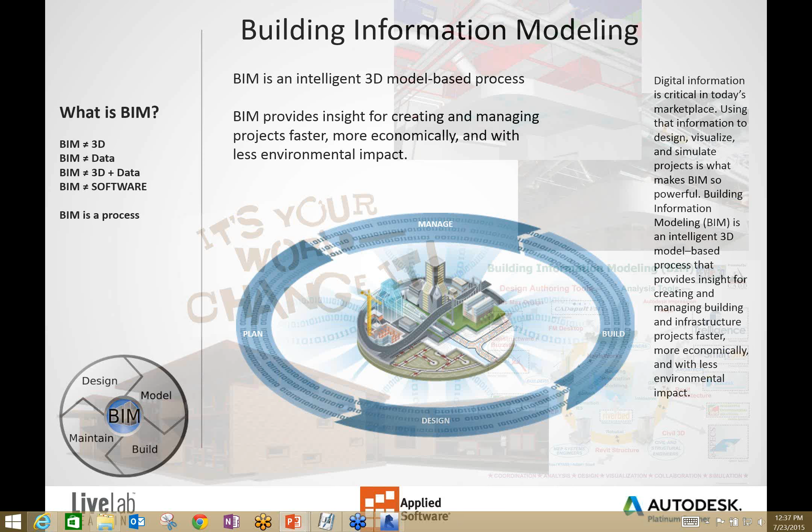So most of you, hopefully, are already involved in implementing BIM, and if not, then hopefully this will be some good foreknowledge or a good stepping stone into the conversation about BIM for multifamily projects.

Some of the basic advantages for multifamily or any project using BIM include being able to contain your project and all the information about it in a smaller data set that is predominantly 3D geometry, but also has relationships and information you can leverage for analysis, cost estimating, lighting analysis, visualizations, and so on. So much capability, and I think people using Revit for multifamily design are already seeing the benefits of that. Hopefully I can clear up some misconceptions about how to use Revit for multifamily design, but also maybe teach you something if you're already using Revit for multifamily design.

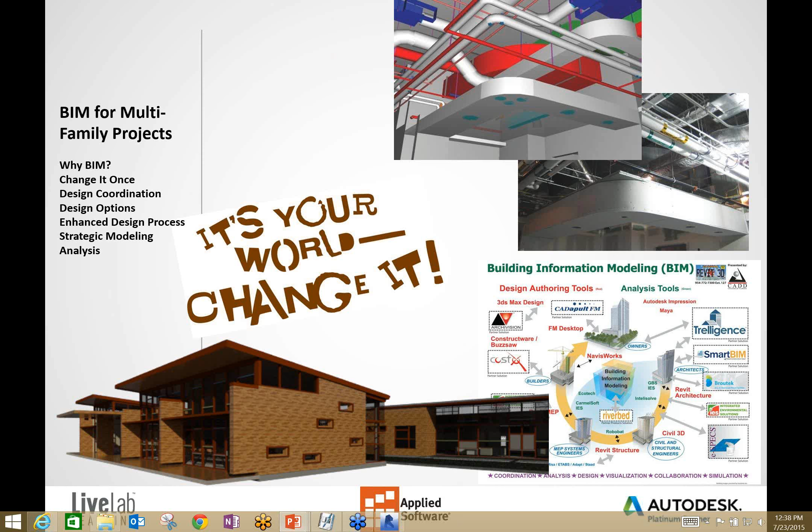So some of the learning objectives for today are just understanding what the current trends are in setting up multifamily projects using Revit, the different advantages of groups versus links. They both have advantages, and we'll talk about how you could even choose to potentially use both in your project.

Can nested families define units? We'll talk a little bit about that and what you can and cannot do with a family, and some of the things you might want to consider in using families for a particular part of your project.

But also clear up any mysteries about whether you can use it for actually the whole unit design. And then kind of sum up about what considerations or things you might want to think of when you do your next multifamily project, and talk a little bit about MEP design for multifamily also. The techniques that we're going to talk about do extend into other disciplines, structure, mechanical, electrical, and plumbing, and definitely want to hit some of the points regarding those.

I don't have a lot of graphics. I intended to open up Revit, look under the hood at some of the basic functionality just so that you can see some of the things that I'm describing, and hopefully generate some questions that we'll leave some time at the end of the webinar for us to answer.

So multifamily, this is just an example, a project that I started with a company, going on 8 years ago, maybe even longer. It was a company that did a lot of multifamily design, and this was one of their first projects.

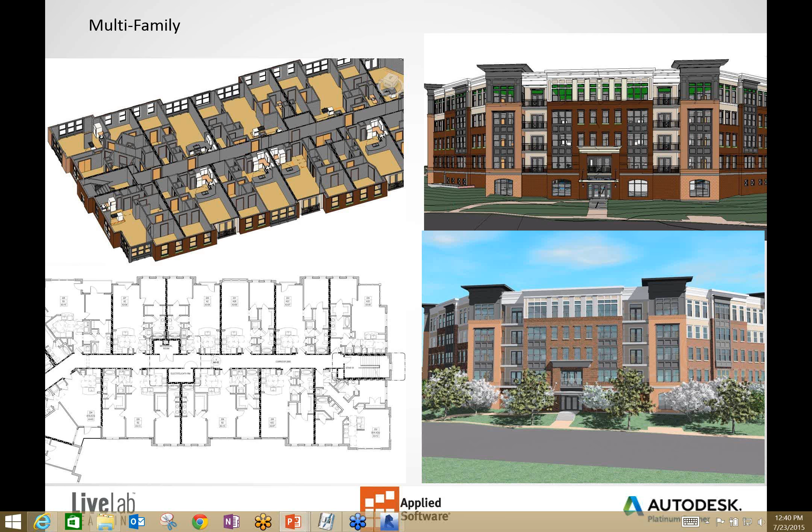So although this presentation is focused on multifamily, it's really about multi-unit design. And multi-unit design includes more than just residential.

Certainly it means garden-style apartment homes, high-rise apartment and condominiums, but it also means hospitality for hotels and resorts where they have units that are repeated multiple times, the same unit multiple times throughout the design. Dormitories, another form of housing, somewhere in between apartments and hospitality, but effectively a similar residential type of use.

Healthcare. So in healthcare, there's also an opportunity to leverage some of these techniques for patient rooms. Sometimes surgical units are defined in a very specific way that they have a repeatable plan, and so that can be considered a unit. In education, you have classrooms often that are used maybe in primary and secondary education, and even post-secondary.

When you get into college and technical school level, you have classrooms and sometimes labs that have a very finite design that end up being repeated multiple times. So just want to make sure that people understand that although this is called multifamily, I almost wish we had called it multi-unit design for BIM and Revit, just because it really can reach into other types of design projects.

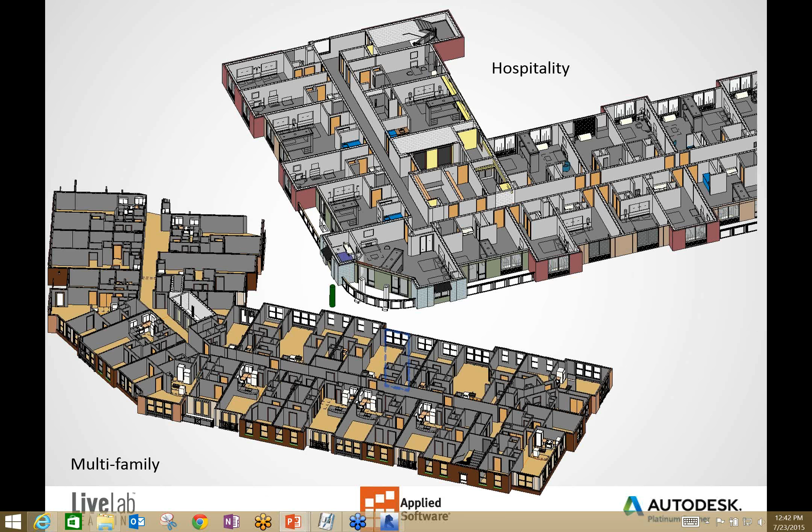Again, just a couple of cutaway views of a couple of different plans, one being hospitality, one being multifamily, and we'll take a little bit closer look at a couple of these plans, use them as examples for some of the things that I was going to talk about during the presentation.

A big consideration in making choices about how you use Revit for multifamily or multi-unit design is going to be the project size. So you may make different choices depending on how large the project is. Many people who are still getting into BIM and may not already have a lot of experience with it or Revit

may not understand that BIM does not mean everything is in one model. Now, as much as possible, we like to put as much of the project in a single model, but when it becomes a large, meandering, say, garden-style apartment project, it tends to be unfeasible to contain that in one model. Or if it is, it does require a lot of view work to break it up.

So you may have a master file, I didn't diagram this, where you link all your buildings into it if you're trying to do a single set of documents, and a lot of people are starting to do that. Again, it's kind of getting back to a little bit of a CAD type of workflow in some respects, but what we're doing is linking all the different parts and pieces of the project into one file that's used for documentation and let the other models end up just being the design.

So I don't want to talk too much about that, but certainly when you get into large campus style projects or large buildings that really need to be divided up, you need to think about that ahead of time.

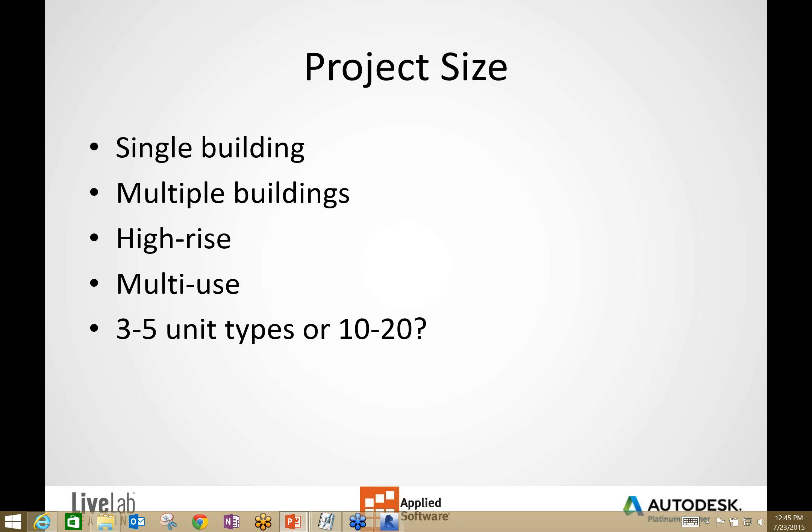So all these are things to talk about. How did we do it in the past, or how are some of you still doing it? I'd guess that a lot of you, if not already using Revit for multifamily or multi-unit design, are using AutoCAD or MicroStation and doing a lot of referencing or XREFerencing depending on the product. You'll have your units as a file unto itself, referenced into a level plan, which makes your composite plan, but you might have base building envelope information from another XREFerence. So you might have this XREFerence scheme in your organization.

The benefit of Revit is to eliminate some of that need, or at least reduce the amount of files. With unit design, you still have the units, and that's a big part of the conversation today.

Lines in lieu of walls. What I mean is, unless you're using a more intelligent CAD package, you're probably just using line work to represent walls, doors, windows, furniture, plumbing fixtures, and so on. Those using Bentley architecture or AutoCAD architecture are using BIM-style tools that allow a bit more intelligence in what you're designing, but you're still working in a CAD environment.

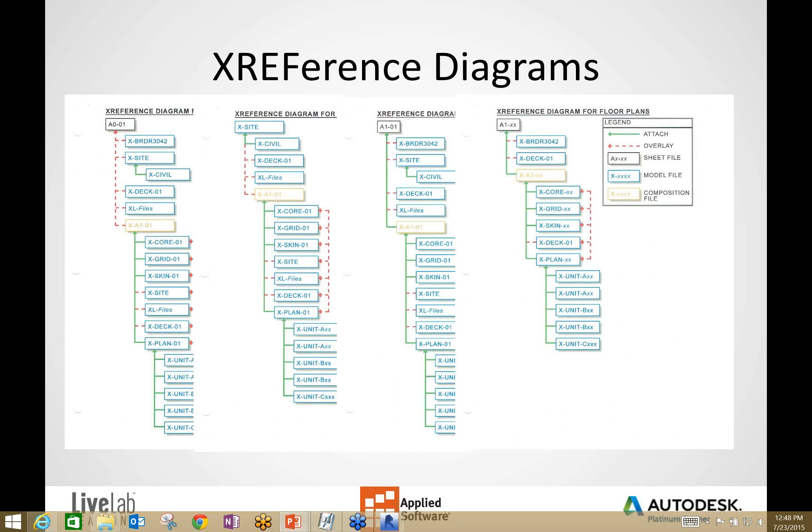So I see a great opportunity here. This is usually a smaller group, often one or two people in a small to medium-sized firm, but they're the ones doing the feasibility studies, getting a site plan and trying to determine how much building, how many units they can put on a project.

They can actually mass the units, group those together, and make a building full of units. You can add levels and intersect the masses and get some quick area analysis and determine what is possible on the site, and even use design options to come up with different iterations or scenarios for different parts of the site. So I may try to do a massing webinar in the future where I expand on this further, and I do have the file that I can pull up if anybody has questions later. But I do think massing has an opportunity in early multi-unit design.

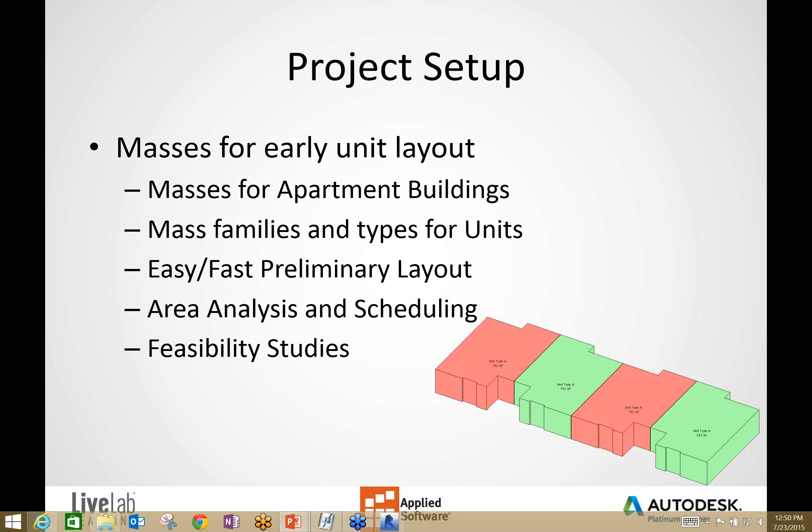So the big question is, how do you set up your project? How do you use this very powerful tool, this very powerful process, and leverage it in such a way that it's going to make your work easier, make it more accurate and less frustrating, and in the end, we want to make more money. We want to do great design, but we don't want to have to spend all our fee just figuring out how to document our designs and get them out the door.

But more and more people are working with larger and larger projects, and there's a lot more coming down the pike. So they've come up with, if you will, more CAD-like ways of breaking up the project where units are separate files and they're being linked in. What that does is give you an opportunity to make the envelope of the building a separate file, and then all the unit interior portions can be designed externally and then dropped into those unit shells, if you will. I've looked at it multiple ways, I've looked at a lot of blogs online, and the trend is going more towards links. But I think groups, either combined with links for different parts of the design, or groups in lieu of links when it's a smaller project, is still a viable way of doing units.

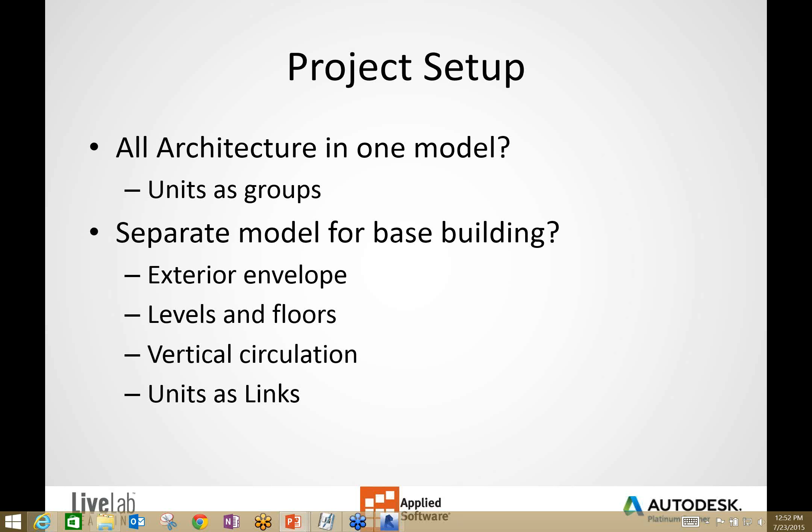So what do you include in a unit? If we're talking about it as a group, does it have all exterior walls in it? Does it have all your doors and windows? Demising or common walls between units, interior walls and doors, casework, countertops, plumbing fixtures, you name it. Furniture - sometimes I've seen furniture in units. Certainly in hospitality you might represent furniture, how things are going to get laid out. Electrical fixtures and HVAC. So again, starting to think about the mechanical engineer and him starting to lay out his designs for the units, and if they're consistent, then he can group his information also to make it more efficient for his work.

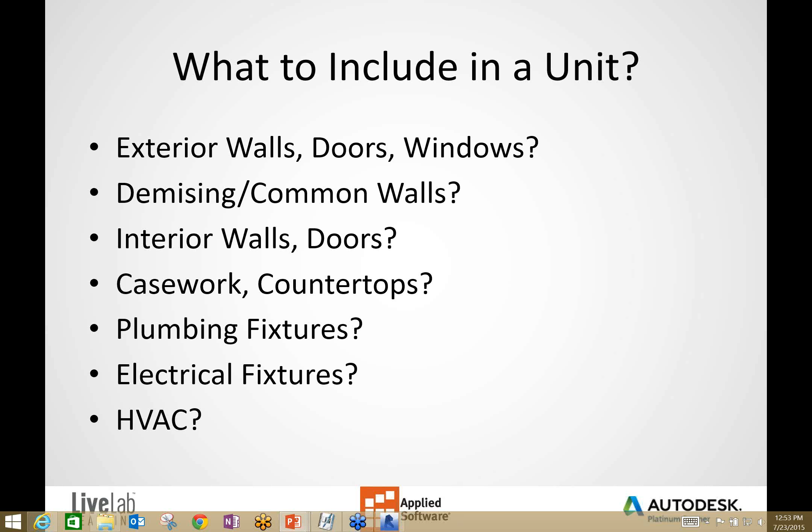So at some point I'll actually get into Revit and just show you some of how this breaks down and what it looks like. Not really big models, but enough that you can get the idea.

So groups, again, as I said earlier, work well in smaller to medium-sized projects. I have an example that I've used for some of these slides - I forget how many units, I think it was about 120 units overall, a 4-story project on top of parking. It was manageable with groups and it worked pretty well, and it was a first project for a team, and they were successful in using it and completing it that way.

So groups are really easy to create, they're very easy to modify, and they have some characteristics that make them very appealing. However, groups sometimes - and I didn't put this as a bullet - do have, for lack of a technical term, some flakiness at times, depending on what you're doing with them in Revit. If you keep it simple and you try not to do too much with groups, and you're very judicious about using the exclude command, groups can serve you very well.

The nice thing about groups is you can start out with them and then you can easily convert them to links, and we'll take a look at that.

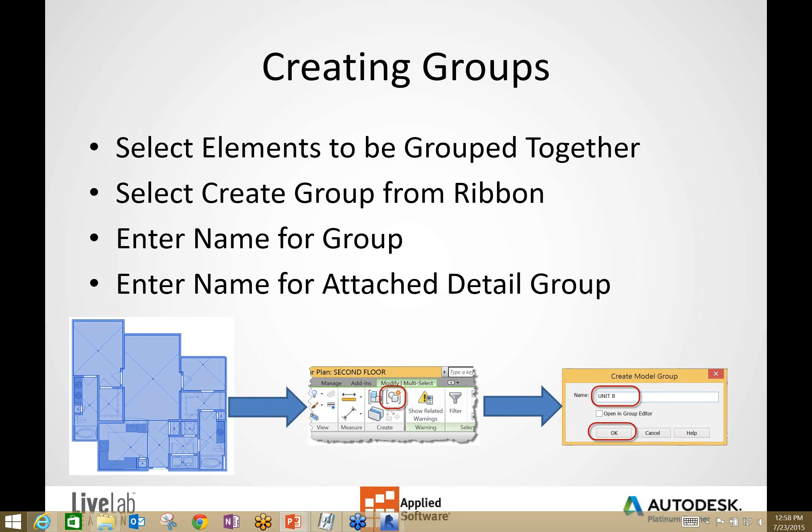A couple of examples of different thought processes on what you would group together. In this particular example, the unit and half the demising wall - since it was a dual stud or dual track demising wall, one side of the demising wall - and the common corridor wall, and all the interior partitions and elements were included in the group, and that included the room objects.

I have tried many times working with clients to include the exterior skin, especially if it's not a heavily articulated skin, and it's just problematic. It would have to be a very regimented, very predictable, and very simple skin, in my opinion, for you to even consider including that as part of your unit groups. The skin generally may have elements that pass from one level to the next, so trying to include just those parts into a group can get very messy and complicated. I don't have any example where I've included the exterior skin as part of a group - it's either its own file as part of a base file, or it's going to be ungrouped, just the exterior skin of the building.

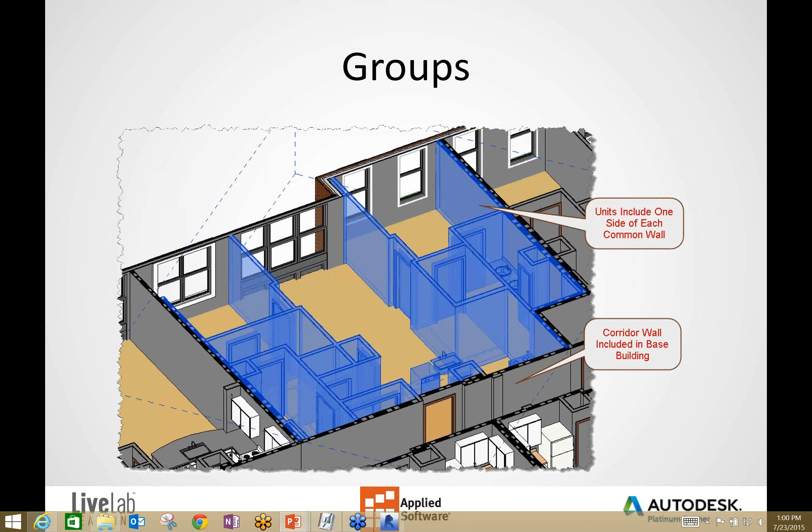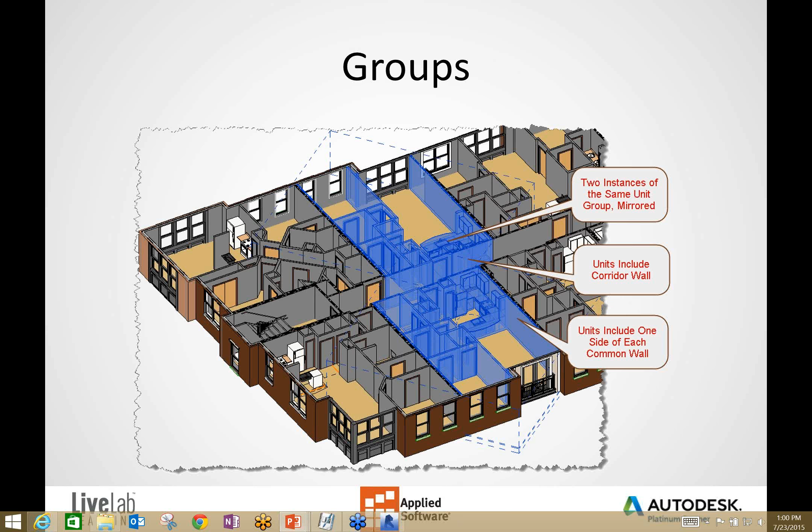So basically that was just a progression of where we did it with this one project, where it was half the demising wall, which can get a little sticky, the corridor wall, and all the interior elements, but no exterior wall elements. Then just dropping off the corridor wall, and then dropping off one half of the demising walls.

That can get challenging with elements that are wall hosted. So you may need elements that are a combination, wall hosted where they're being hosted by a wall that's part of the group, and duplicate versions of those where they're not wall hosted and not dependent on a wall for hosting them. That way they won't accidentally disappear if the wall that they need is gone.

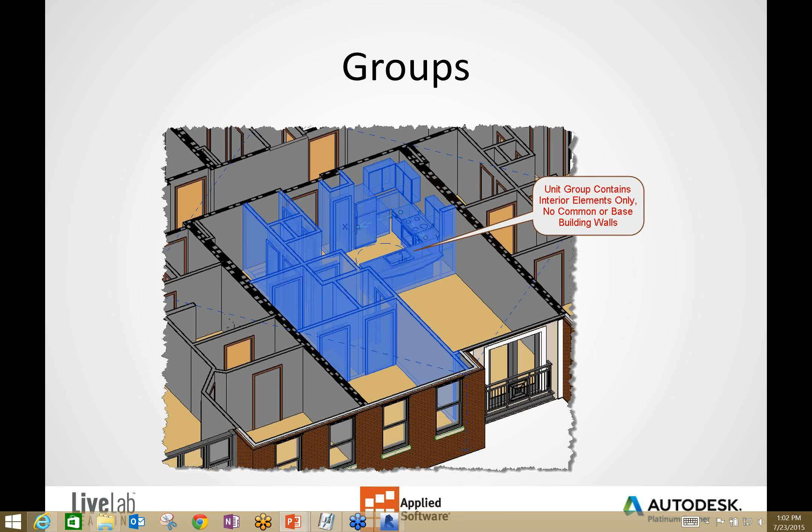Another reason why you typically leave things like doors and windows as part of the exterior skin, as part of the skin file: if you put those into the group, they will always need a host. The nice thing about groups is even without a host, the definition of those elements will still remain in the group, so that if you reintroduced a host element for them, you can re-include them into the group, and then they'll find the host if it's in the right place.

Not ideal, so I tend to advise people away from that, and it's also something you'll see in a lot of the blogs and postings - be very wary of wall hosted elements, or hosted elements that are hosted to elements that are not in your group.

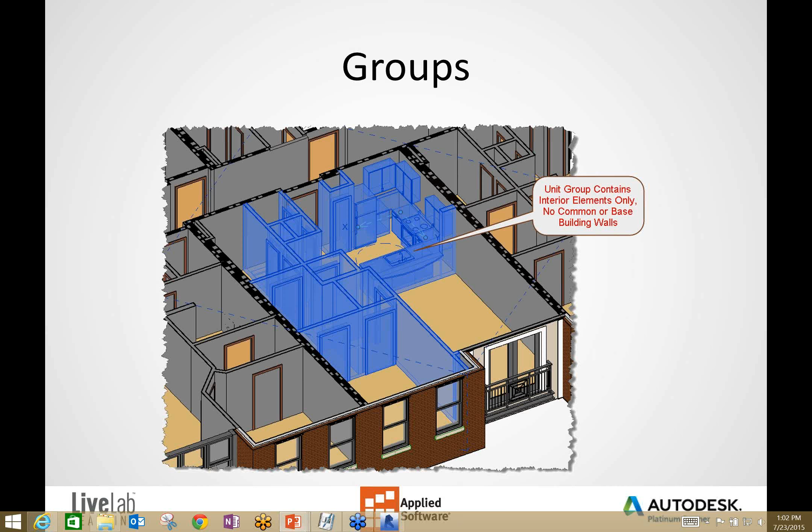And then there's the ability to replace groups with a link. You can do that dynamically by just converting a group to a link, but you can also send a group that's defined in your project out to a file, and then at a later date replace it using that same tool, but now using a file that's already out there that was generated from the group definition that maybe somebody else worked on. So I didn't clearly state that in this slide, but you do have a couple of ways or workflows for doing that.

Again, best not to group hosted elements without the host. Floor-to-floor changes can be challenging. I've had some friends and clients who have created unique workflows for making the walls extend to underside of slab at one level and then vary it at another level just by ungrouping at that level, extending walls, say, to underside of the floor above, and then placing multiples of that, and it seems to work for them. But again, it can be challenging, and there can be hiccups along the way, and you may have to verify wall heights at some point to make sure they're not too high or too low from one level to another where there's a different floor-to-floor height.

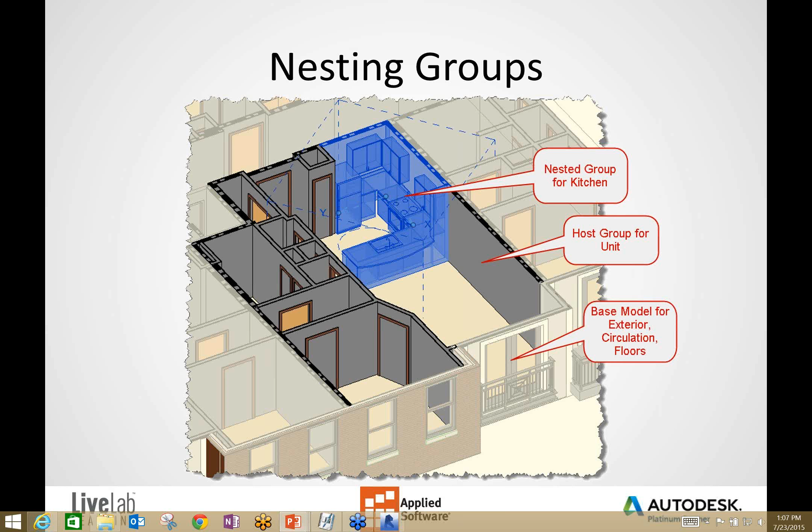So some of the pros and cons for groups. I would say the pro, the workflow, it's very easy. In-place editing is awesome. The walls are easier to make cleanup with the demising and the exterior skin walls as long as they're all in the same project. You're just making your views right there. You don't have to maybe make them for the unit plan elsewhere.

Scheduling is really good except for the units themselves. So you do need something else to schedule the units, and that gets to the family. Maybe I shouldn't have put that bullet in the way I did. Less management? No, I'd say it's different management.

Override, so the whole being able to exclude elements. Performance? That's going to depend on a lot of factors, like I said before. Number of units, variations of units, nested units, size of the project, so the overall number of instances of the group.

As the numbers go up, that's when groups are going to start to look less and less attractive. Cons, again, performance gets worse as it gets larger, but that's pretty much typical of the nature of the beast. The more complicated, the more stuff, the larger the model, your performance may take a hit.

There are some known issues with groups. Some people have inconsistent results mirroring groups. I guess I've been pretty lucky, but I'm not doing a lot of production work these days.

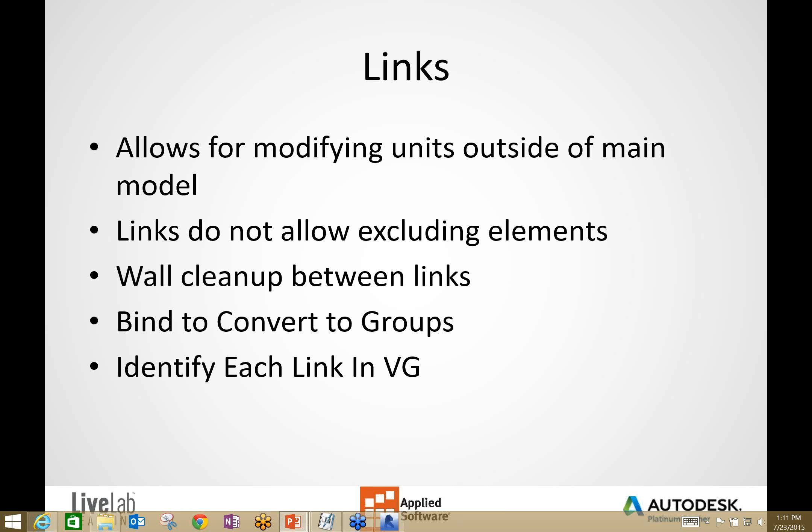Links are easy to identify by giving them a unique name, which can be the unit number, the unit type, or a combination of both in visibility graphics.

It does tend to keep individual files smaller because now you're linking stuff, and you can unlink when you don't need a particular unit or units, and just work on, say, the exterior skin of the building. Certainly if it's a workshared project, that comes into play too, allowing you to put your linked units into separate worksets.

It does help control the consistency of the unit layouts a little bit better, because you don't have an easy way to exclude elements. They're pretty flexible and similar to a CAD workflow. That's not a bad thing.

I'm just trying to make an alignment there, and a lot of people have been saying that, but in the back of my mind, you're still using Revit for your units. You're linking them, which means you're combining them together into a composite model. That's still good. You're getting the benefits of Revit for all the work. You can still schedule it. You still get the immediate update. So even though it's more of a CAD workflow, it's still BIM. Don't let anybody tell you otherwise.

And again, I put the question mark after this. Some of these actually came from comments people put on the web, so they're not all mine, but I wanted to be a little bit transparent with you all.

Let's see, management issues: system names, avoiding duplicates, dealing with documentation issues. The only issue there is the same anywhere as if it's a big project with multiple files - you've got to bring them together, ideally if you're doing one set of issue documents.

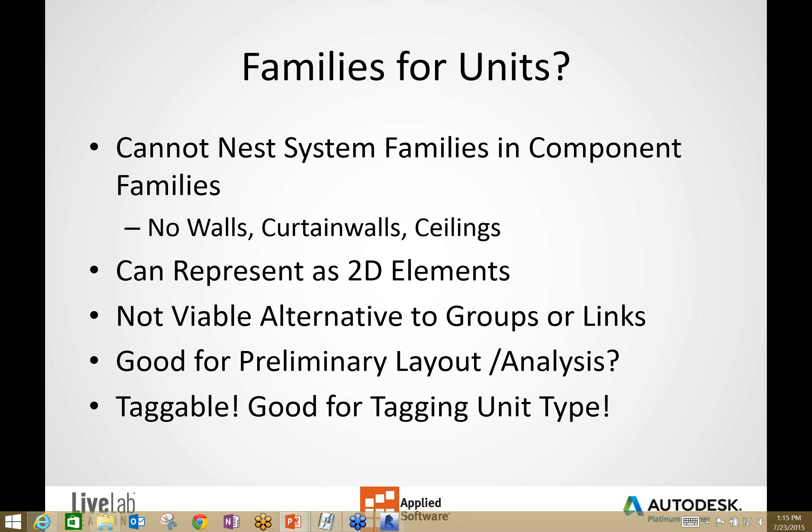I like area plans also as a way of showing just the unit layout and also doing color fill plans with it. So I'll just jump to it, and basically area plans are already in Revit. You can use the area separation to define what the limits of a unit are, and then you can give these things a number. You can give it a name that represents the type, and it will also calculate the area for the unit, so you can very quickly get a nice way of presenting that stuff, but also labeling it.

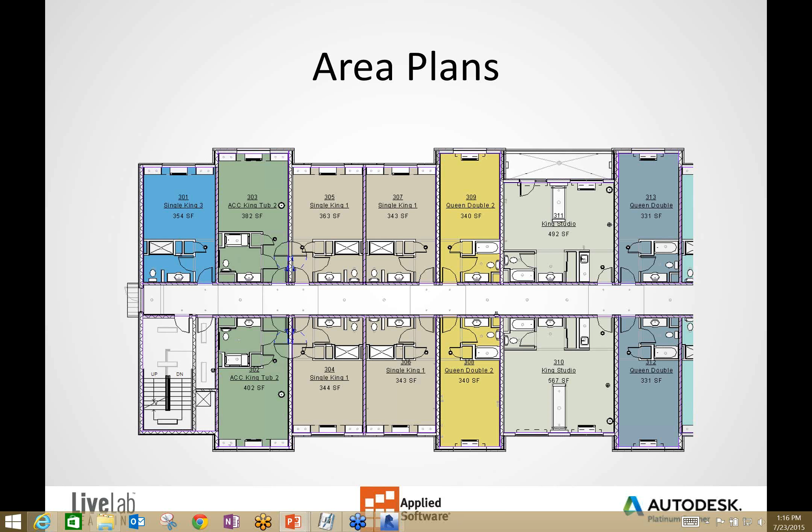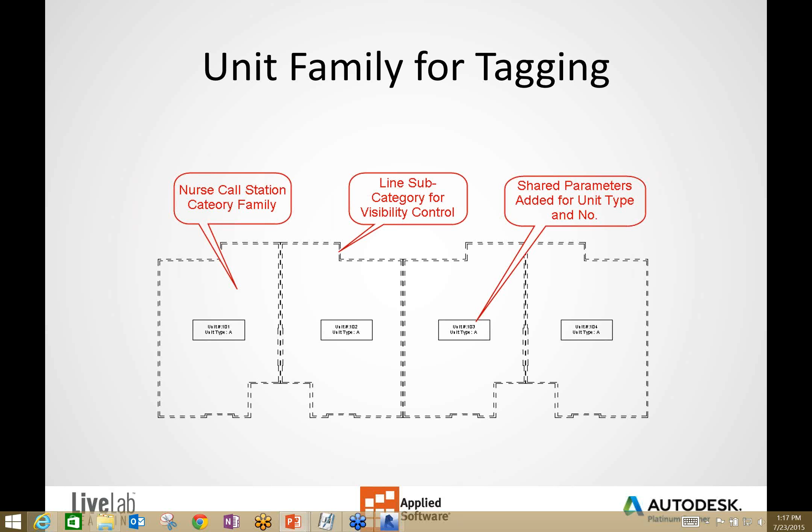We still need a way to label the units, and most people I've seen are just using a generic tag. Going back here, what I did was set the family category to something unused, like a nurse call station, which I'm not using in my multifamily residential design. If it was assisted living, you might actually use that. So you just pick some less-used category for the family so you can isolate or filter it out.

All right, we're getting close to the end of the slides, and I should hopefully have a few minutes to open up Revit and show you a couple things.

Groups are still a benefit for MEP design, provided the layouts are the same. If you have a unit A and then A1, 2, 3, 4, 5 with only minor variations, but the HVAC is identical in all of them, why not group it? You can. Most multifamily design has HVAC as an isolated system for that unit anyway, which makes it good for grouping. When you get into classrooms, education, or healthcare, it may not work out as well, and you may not be able to leverage the benefits of groups or links. But certainly for multifamily, it's there.

Electrical, not so much. You can group the fixtures and equipment, but the panels and circuiting should not be grouped. At least that's the wisdom I was given by my MEP expert on staff, who actually co-authored a book on Revit for MEP, so he's quite knowledgeable. He's an architect first, but he's put a lot of time and effort into working with engineers on that book.

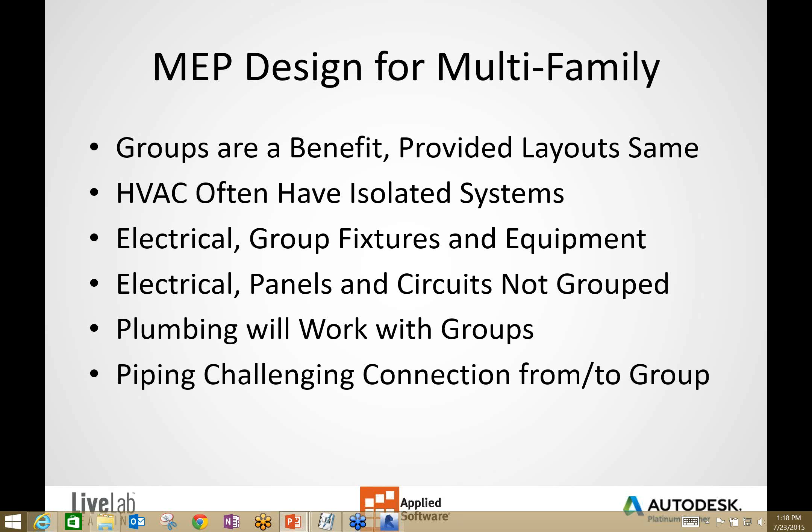Plumbing will work too. The biggest challenge with plumbing is where you have a supply line coming in, or maybe a waste line coming out to a central line. Where they connect, it will want to put in some sort of connector. I meant to put some more detail in this slide, and I think I forgot.

Obviously, common areas, public space, and amenities won't be grouped—they're just part of the overall design.

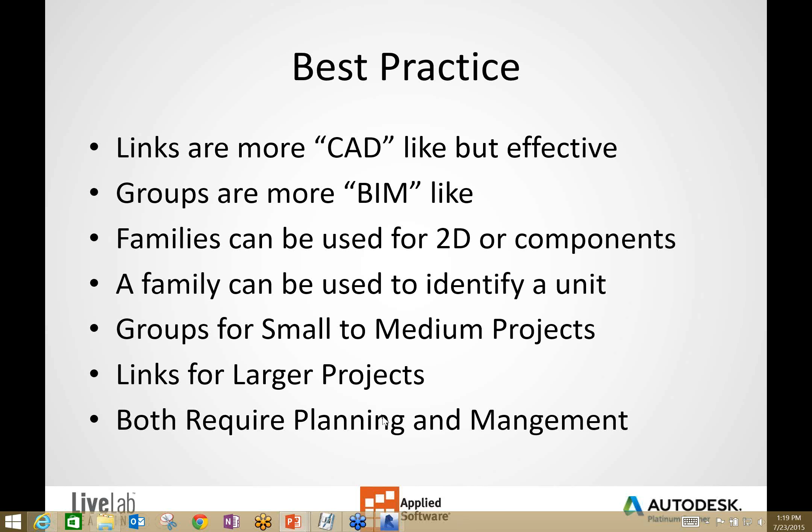Let's see, I've kind of gone over all this. Links are more CAD-like, but effective—and don't take CAD as bad, it's just a more CAD-like workflow, let's put it that way. It's still BIM. Groups are more BIM-like because everything's in the one model. That can be a good thing, but as the project gets bigger, maybe not so much. Families can be used for 2D or components, but not for wall geometry or system families. A family can be used to identify a unit, as I showed you. Groups are probably best for small to medium projects. Links are probably going to be better for larger, more complex projects. Either one is going to require some careful planning and management.

Some more best practices: work sets. Obviously, if it's a work-shared environment, work sets can be a good way to isolate some of the geometry, whether it's some or all of the units from the main building, the amenities, or even different levels.

Phasing can be helpful too. I've seen phasing used—I don't want to give away anybody's secret sauce, but I'll throw it out there so maybe you can explore it on your own. Phasing can be an interesting way of setting up units as a whole unit, and it can be used to control when and where, say, common walls show up in a linked model, and where they're going to be linked.

Again, families can help with tagging, and groups and links can be used together. You may link the main geometry for your unit in, then copy it around, mirror it, whatever—mirroring links works wonderfully. Then use groups to populate some of the detail information that may vary from one unit to the next, like furniture or maybe even a kitchen.

I probably should see if there's any questions. I may switch to Revit while Casey's maybe sending me a question or two, but I'm going to go ahead and at least open up Revit here.

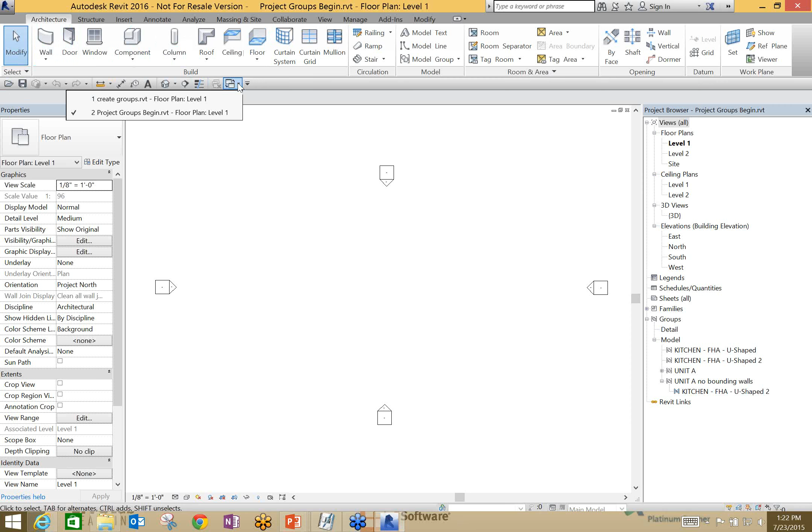The first question is, can you go over your reason for switching a group to a link? This might be a good segue - you may have some units you've developed in the past on a project. You could export them or save them out as their own files, and then when starting a new project, quickly bring them in as groups to start your tentative design. Let's see, I have another model here, and once the group layout has settled down a little bit...

...then you could actually export them back out as links. And when you export something out as a link - let's see if I got the right one here. This is all for creating a group, but these are all the same one. If I created this as a group and it's all the same unit, say there were 10 of them on the floor, I could pick each one of those groups and send them all out to be a link, or have a file that already exists replace them as a link.

So early in design, groups may serve you better by not having to coordinate links and where demising walls are, everything. You do some of that with the group in the design, and then once it gets further along, maybe into DD, you convert them over to links. So I see groups as a way of starting a project and then converting them over to links. I hope that answers the question.

And then someone added to that - when creating a link, is a common reference point needed? No.

I'm kind of laughing because I was working with a couple of files earlier and I didn't realize the unit was at some elevation way up above the basic template I was starting with, and it wasn't showing when I linked it in because it brings it in at that elevation. So elevation is probably the biggest thing to watch for with a link. As much as possible, start with a common base project elevation of say 0 feet 0 inches, instead of having your project at 0 and your unit from some other project at some other elevation. But other than that, no, because you're going to be moving, copying, mirroring, and potentially rotating them anyway. But the level thing can take you by surprise, like it did me.

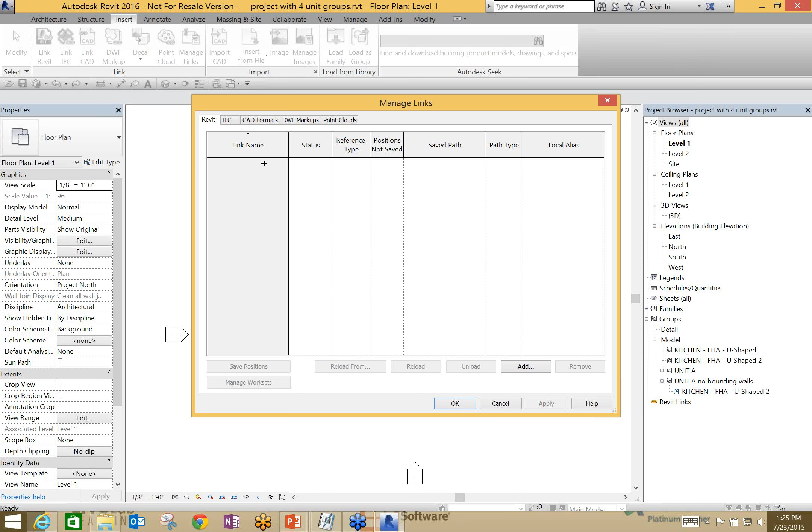Can't remember if this one's... oh, these are all groups. Sorry, this isn't all links, that's not going to help you. Yeah, these are all groups. But effectively, if this unit was linked in and I go to open up that unit file that's linked in, it will unload it from this file. Then when I close out of the unit file, I'd have to reload it. You do that through the Insert > Manage Links dialog, so you'd have an entry for every unit that was loaded in. The one you opened up would become unloaded and you'd just have to reload it.

What was your reason for not including windows in groups and keeping them live in the model? Is this to reduce live wall hosting problems with the windows?

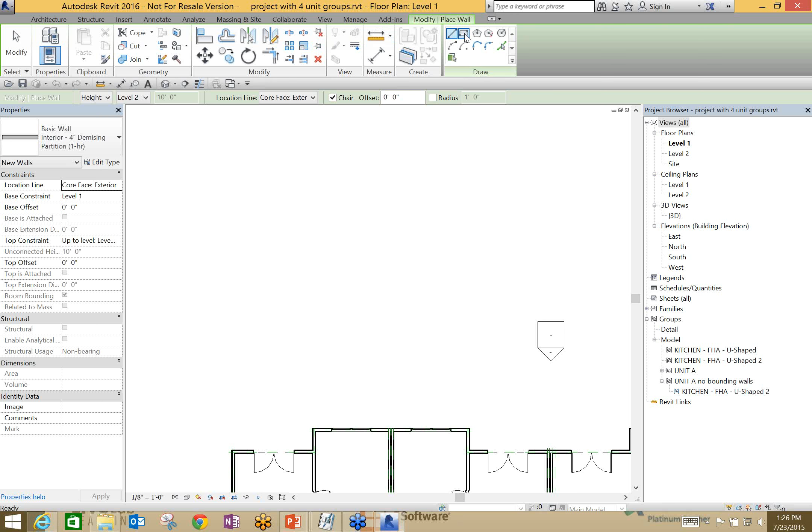Yeah, I'm going to do it with something a little simpler because it'll be easier to show, instead of working with one of these bigger layouts. So let's just assume that's my unit plan. I'm going to keep it really simple... wall. Okay, and just to keep it simple, I'm just going to put a window here, okay?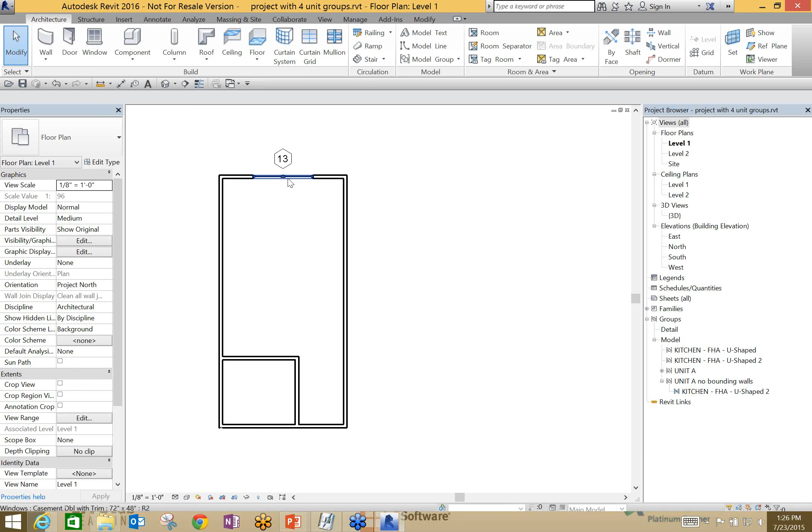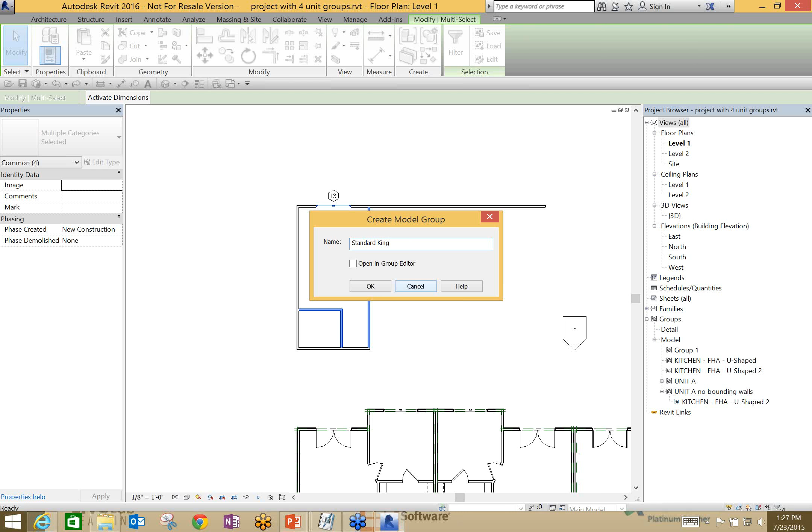Now, if my unit is just going to be the interior elements, whatever they may be, imagine this wall keeps extending out here, and maybe I decide to take this as well, and I go ahead and make a group of it. So you select your elements, use the Create Group tool, and I'll just call it standard king or something like that - using hospitality as an example. So there's my group, and I can even move the insertion point, maybe make it the inside corner of that room.

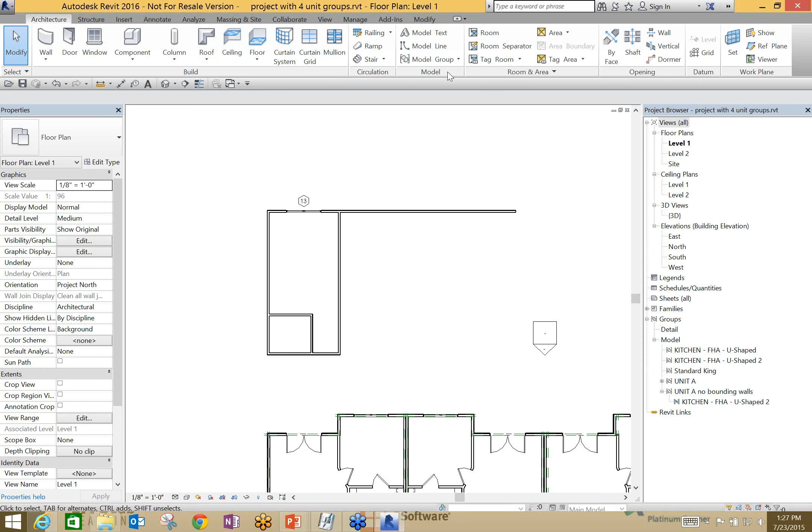So if I want to place this now, that window is part of my group definition. And that's one thing that's pretty clever that Revit does: if I come over here, I've got two ways of placing a group. I can go to the Model tab, Model panel, and go to Model Group, Place Model Group, and then any model groups will be listed in your type selector. I want to do the one I just created, which was Standard King.

Now, as long as I place this with that same insertion point where that window will intersect that host wall, I've got no problem. You notice that this group placed and that window placed.

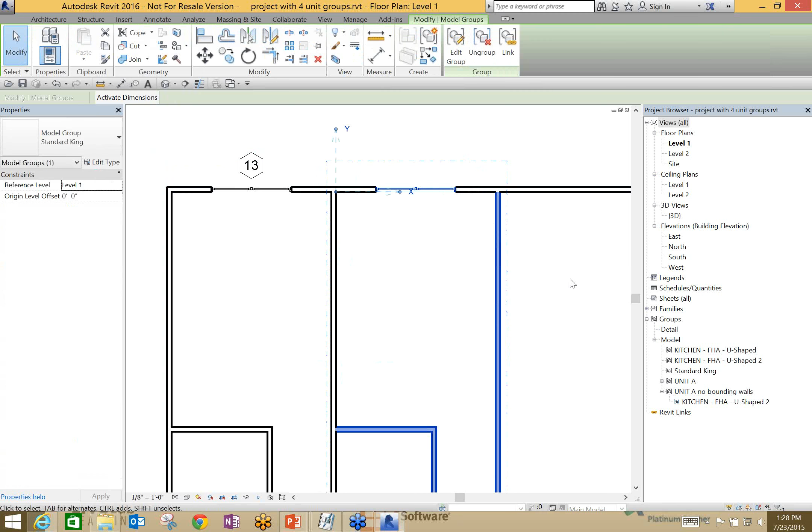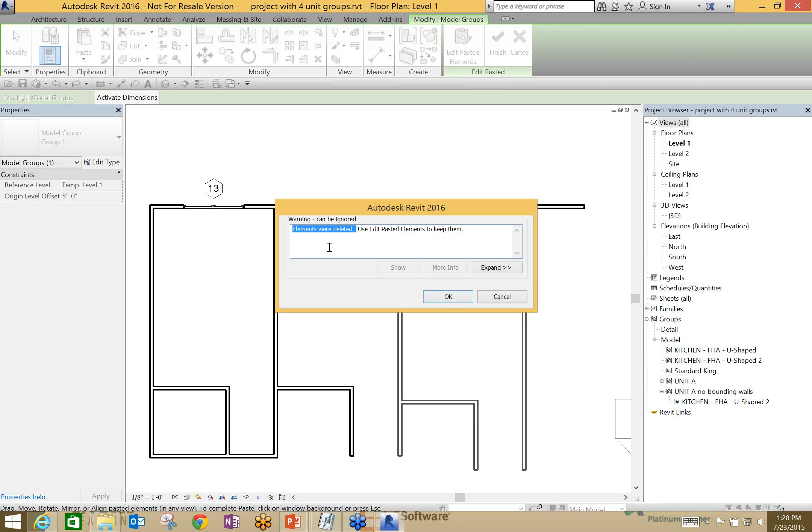The biggest problem, and this is correctable by the way, is if I place this group again and say I either get a little twitchy or I just snap to the wrong thing, when I let go of that group it's going to tell me elements were deleted. That language is typical Autodesk Revit scare-you language, but it's not absolutely true. So if I hit OK, well, great—first of all it's in the wrong position, but notice what happens when I hover over on top of that group and select it: that window is still there.

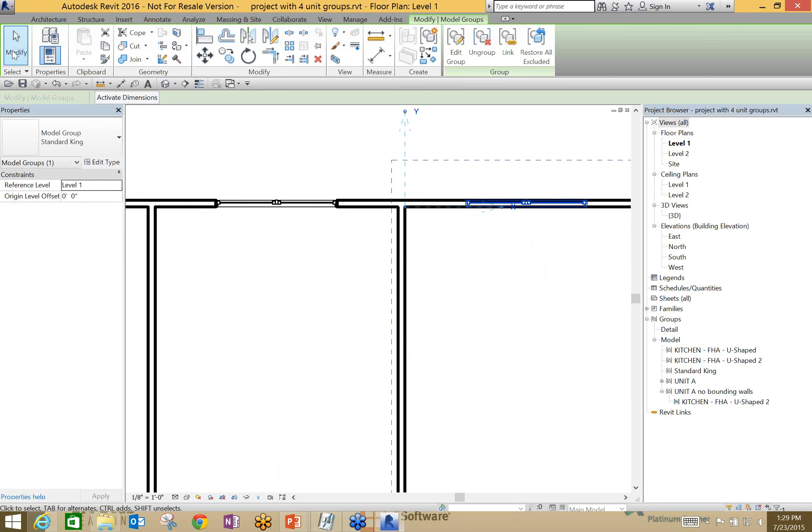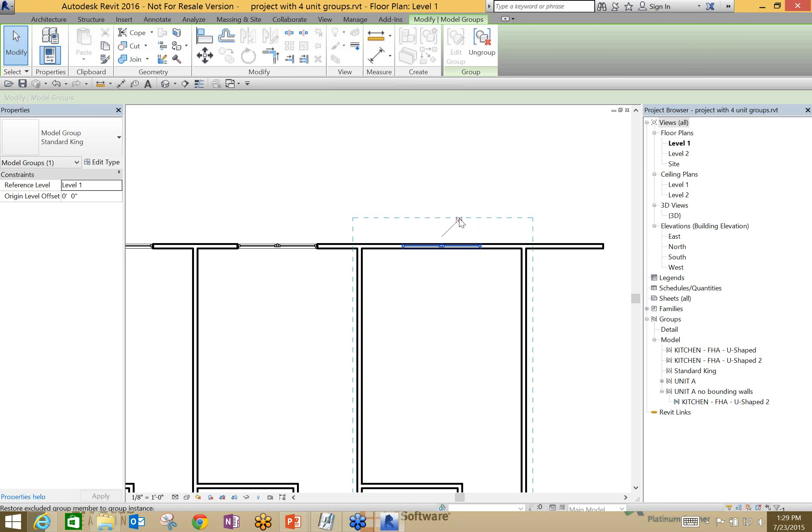So if I now move this group into the correct position, let's see if I can find its insertion point and bring it up there. It will not automatically be re-included in the group. I would have to select the group, hover over it until I see that element reappear, tab over it until I can select it, and you'll get an icon that allows you to restore it or re-include it back into the group. When you do that, it will find the host and you'll be okay. So it's not that you can't—you'll just run into situations where elements won't appear if they don't have the host. But if you reintroduce the host, you can make them reappear.

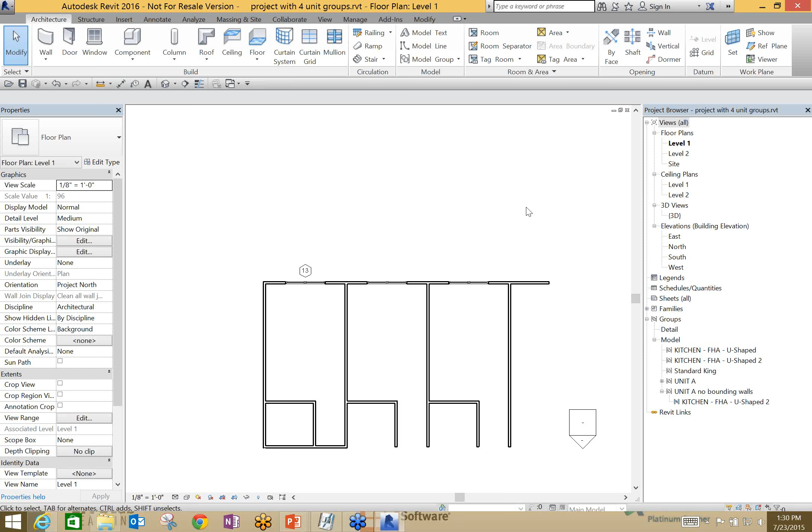What is your workflow for populating the building floor plan with groups while windows are live, for easy coordination between the unit plans and the overall floor plans? Windows live, meaning in the group?

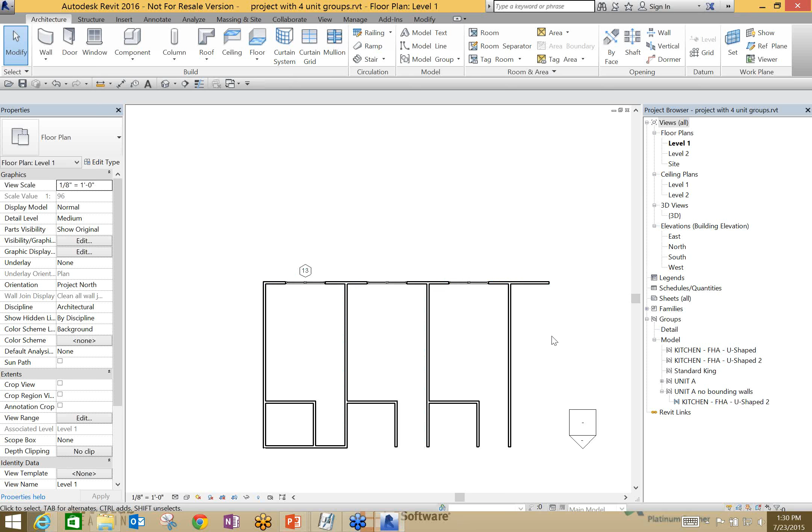If that's what you mean, I would still recommend against it. If it's something simple—not to talk ill of this type of work because I've done it myself—but if you're doing, say, interstate hotels where it's very rhythmic with not a lot of articulation to the facade, you might be able to put the window in it. The problem is the only way you're going to keep laying out units like this is to make sure there's a wall, or you're going to end up putting a wall there. My preference would be to create the shell and make sure as you're laying it out you're accommodating the unit sizes. That's where something like this family I had created, granted it's not going to look like that, might be a good way to lay it out so you can get an idea where the skin goes, where the units are going to go, and then come back and populate it with the interior unit plan. I'm not sure if I'm answering your question, but...

I think that's how I was interpreting it. Okay, there's one last question: can you extract quantities such as square footage of drywall, flooring, etc.? Yes, from groups and from links.

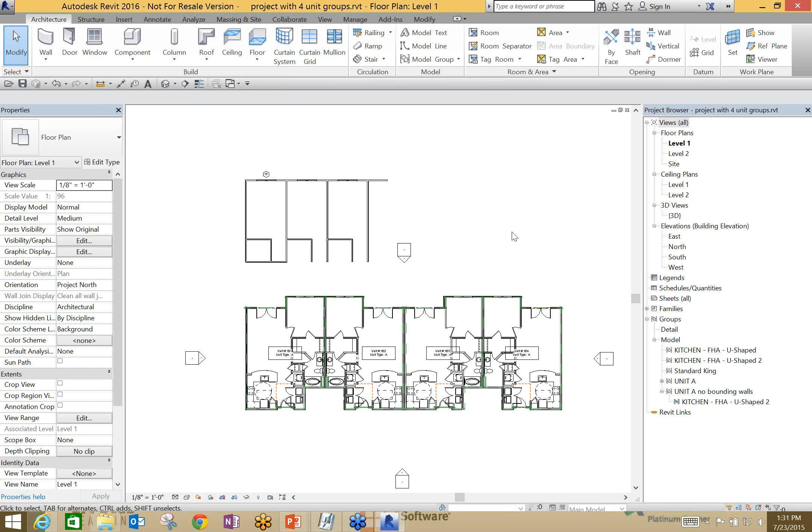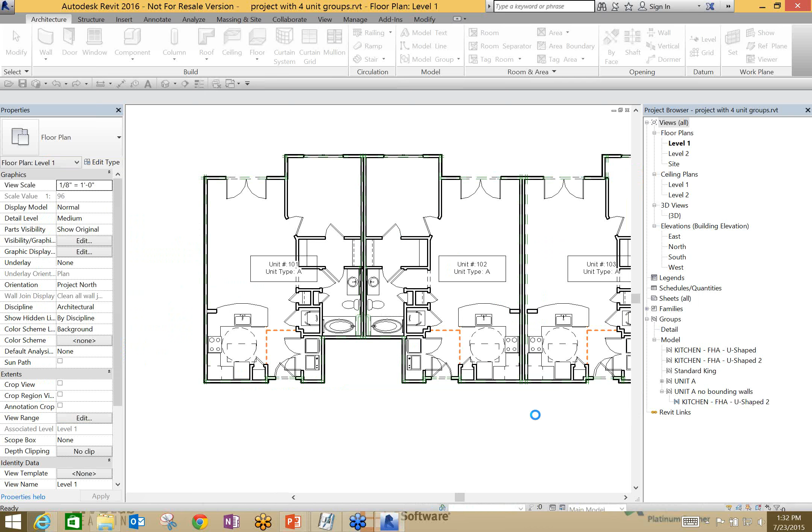Are there any other questions? Why not have the reference planes as part of the unit groups to be used for easy alignment? Oh, I actually do—I just didn't really highlight it. If you'll notice, I actually have... let me see if I've got that unit plan handy. That's actually a really good question. I've seen more and more people using reference planes as part of their overall plan and also part of their unit plan, so it makes it easier to align them. So the answer is yes, that's a good idea. I just didn't make a point of it in my presentation, and I should have.

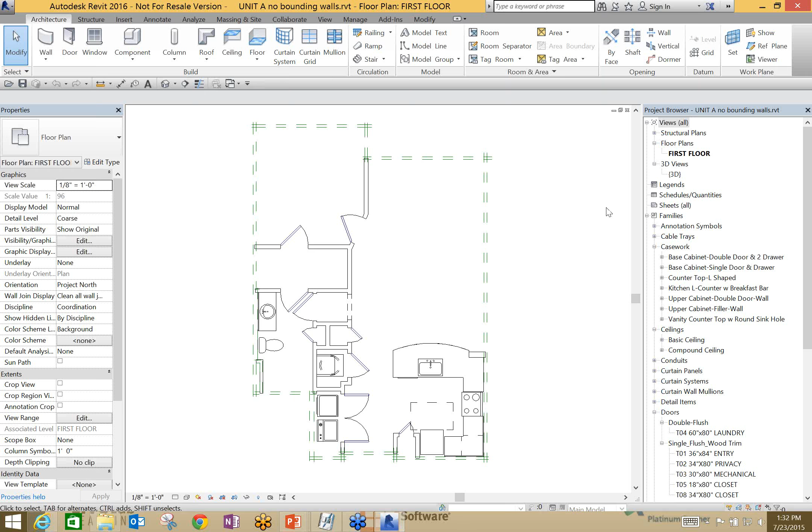All right, if that's all the questions, then we can go ahead and wrap this up. Anything else? Anyone else?